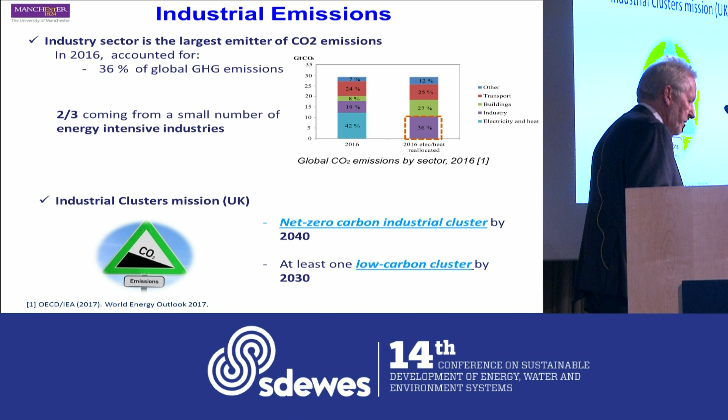In the UK, we have made a commitment to decarbonize, and we have committed to create the first net zero carbon industrial cluster by 2040, and at least one low carbon cluster by 2030. So that gives us a picture that industrial emissions are key if we're going to solve this problem of having a sustainable future. So industry is the largest consumer of energy worldwide.

You see here the breakdown, some 32% coming from industry. What's interesting also is that a large part of this, most of it, is actually down to process heating. Some of it is electricity generation, that's significant, but process heating is a major element there. So 69% of industrial emissions are from the process industries of that industrial sector, accounting for about two-thirds of industrial emissions.

So if we pursue this issue of how that energy is used, it's shown here as a breakdown in terms of process heating. We're taking this part of the energy consumption, 60%, and showing it broken down in terms of the temperatures at which it occurs. Although you can't read that, I can tell you that around 50% is relatively low temperature heating. Of course, if you go to steel making, it's very high temperature, but most of this heating goes on below 500 degrees C, and that's key to us.

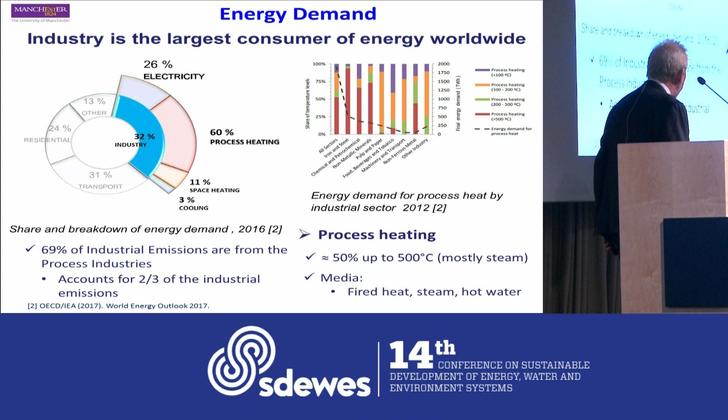Most of that would be supplied via steam, but we have different media coming into play. We've got fired heat, furnaces, steam, hot water, all coming into play.

Now, if we look at the trend with energy consumption, we see here a steady growth in demand for energy in industry through time, and around 2014, we saw a decrease in the rate of increase. I choose my words carefully here, we're not seeing any decrease in consumption, the rate of increase is coming down a little bit. Well, it's coming down significantly, slowed down to a third of that rate of increase. And that's good news, it's remarkable.

But if we just project going forward what the implications of that are, we just trend that away into the future.

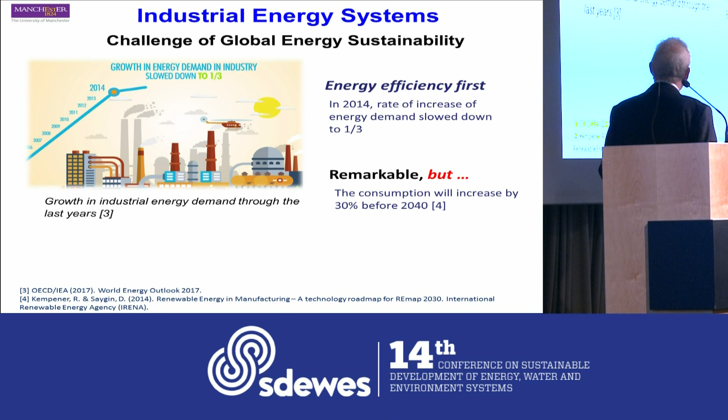That means we're going to use 30% more energy before 2040. Now, what does that mean in practical terms? It means adding another China and another India onto the consumption of energy, and that doesn't appear to be too sustainable. So, alone, energy conservation is not going to solve the problem.

We've got to reduce our demand for fossil fuels and their associated environmental impact. So the challenges here are we want to switch to renewables. We also want to carry on with energy efficiency. Both of them have a key role to play. What we're looking for in the long term is a 90% reduction in CO2 emissions by 2050, so that we can fulfill the Paris Agreement and keep our global temperature rise below 2 degrees C. That's the goal, and that trend is to move us to a more sustainable use of energy.

Let's look then, if renewable energy is going to be a key player, at the growth and how that's going. If we start with a baseline of 2015, renewable energy starts with some 19% of global energy demand coming from renewables. In power generation, that means 23%, but in the industrial sector, only 9%. So the industrial sector is lagging behind in terms of its adoption of renewable sources.

Then we project that through to 2030. That takes us to somewhere in the region of 21 to 37% of global energy demand being satisfied by renewables, which in industry would be projected to be 13 to 23%. Now those are rather large bands. The lower bound here is simply by carrying on with current policies. If we carry on the way we are doing, then we're going to achieve 21% and 13%.

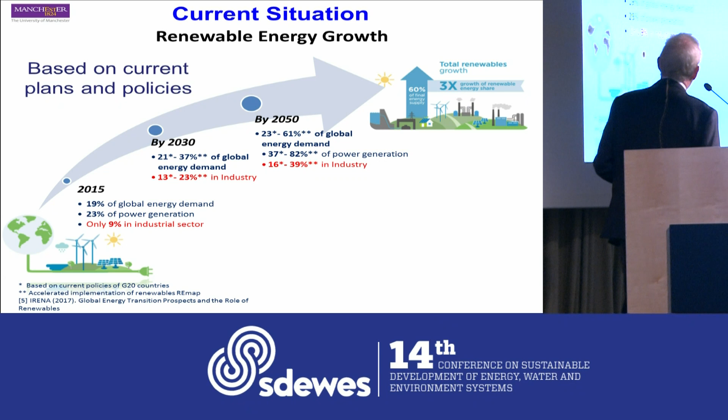Project it forward then to 2050, and we see some 23 to 61% of global demand being satisfied by renewables. In power generation, higher, as we would expect, 37 to 82%, and in industry, lagging behind, 16 to 39%. So the industrial sector certainly is lagging behind, and the good news is we're looking to something like 3 times the amount of renewable energy being used. So that would give us effective decarbonisation, but it also brings problems with it.

It causes fluctuations in supply, wind and solar. We don't have to explain why we get those variations. And to compensate for that, we need additional electric generation capacity.

So let's follow that through now and look at the implications in a bit more detail on future industrial energy systems. We've got to start with cogeneration. Combined heat and power generation: we use the energy both to generate electricity, and the energy that we're not using is used to generate heat, rather than the standalone arrangement where we have standalone power generation and we fire fuel to provide the heat that we need separately.

There's no new concept there. The Victorian engineers were very good at implementing this. It was well known to them, but we still somehow keep on learning this lesson: that combined heat and power generation is the most efficient way to generate electricity and heat. If we use CHP, it's some 40% better in terms of efficiency.

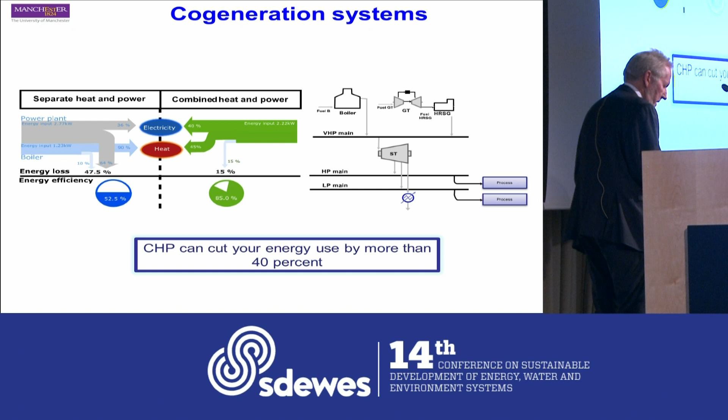But what we need to do then is to look forward and see how we might exploit that further. Let's start with where we are now at the moment. What we would tend to do is have electricity which is being distributed from a substation. The electricity is coming from centralized power generation via a centralized grid, but we'll expect to see certainly more solar and wind contribution to that supply, which would then go off to the residential consumers, to the commercial and industrial consumers here.

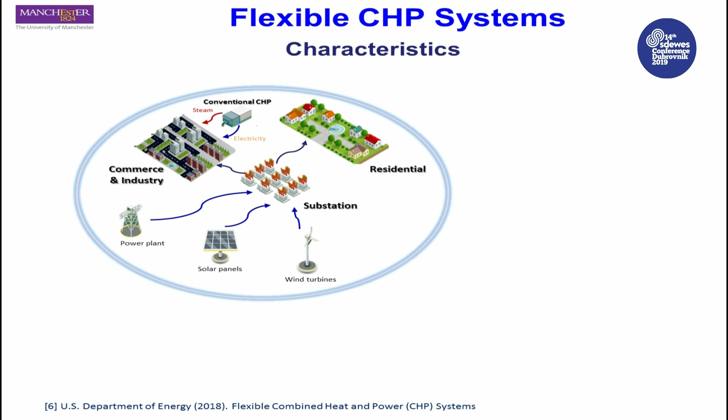And we're likely to see also conventional combined heat and power here. Not too much of it, but certainly some there, supplying heat and electricity locally to commerce and industry. What we need to do is make this whole concept more flexible and bring industry into this picture. So here we've got industry, heavy industry, playing its part in society, but being supplied by another CHP system, linked up to residents, perhaps providing hot water via district heating, electricity going into the substation, electricity may be going directly into industry, with waste heat from the industrial usage being used usefully in this flexible CHP plant, probably being upgraded to make it something useful.

So what we're looking towards is a more distributed nature of power generation.

Distributed, we obviously need to interact with the grid. We can provide both thermal energy and electricity with this arrangement, and we can also produce electricity for the grid. These flexible CHP systems can provide grid services, and I'm sure they're going to be important in the future, but there's very little attention being paid to them so far. It's very difficult to find examples even of this kind of decentralized combined heat and power arrangement.

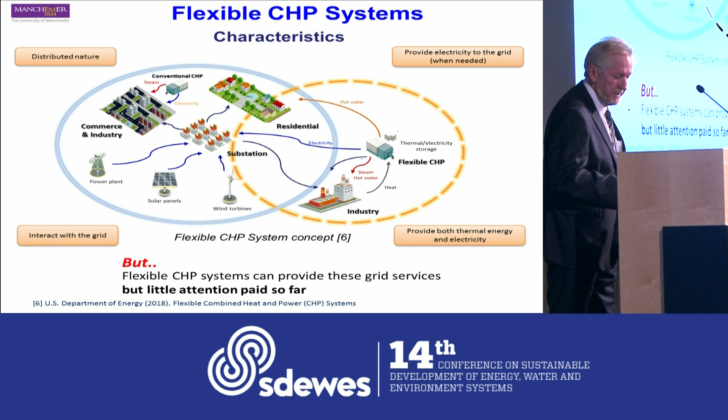Let's look in particular now in a bit more detail at an industrial system. We're supplying heat here in an industrial system. So a few words of explanation for those who are not familiar with steam systems: we use steam for most of the heating in our low temperature applications in industry.

And how do we generate the steam? Well, we fire fuel in a boiler, generate steam. Here it goes into a steam header, which is distributed to the various users. This is high pressure steam, at a high temperature, and then we let the pressure down to lower pressures of steam, medium pressure and low pressure steam. We let it down through steam turbines, and this is a good example of industry using combined heat and power.

We generate the power and we take the heat and use it for process heating. So we see here process heating at the high pressure, medium and low pressure levels. We've also got, just to complete the picture, some letdown stations, which are controlled arrangements to control the pressures of the steam headers. But traditionally we feed into this steam system by firing fuel in a boiler, which generates the steam that goes in here. That's a typical arrangement.

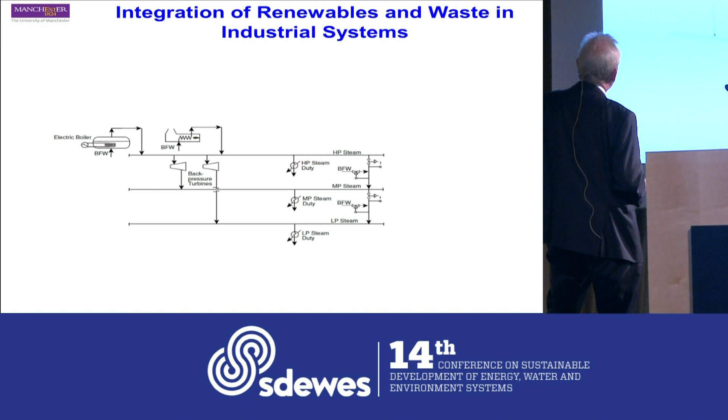If we look at what's likely to happen in the future, we're likely to see more renewables coming in. Now, renewable energy is going to come mostly in the form of electricity—whether it be hydro, solar, or wind—so we're going to get more of our energy as electricity. In which case, rather than having a fuel-fired boiler, we're going to have electric boilers, just like a big immersion heater generating steam.

This has important implications, because if we were just to take in electricity rather than firing fuel, we would use our electric boiler to generate steam. But there would be no point in having steam turbines, because there would be no point in turning electricity into steam and then turning steam back into electricity. So the system will have to change completely if we adopt this kind of renewable energy source.

But of course, life is never quite that straightforward, because we have other sources of energy likely to come in as well—for example, biomass. We can bring in biomass as a source of energy, whether it's crops or agricultural waste, and it comes in as some form of energy here, which is likely then to be fired. And in industry we're going to have a lot of waste gases. Certainly in the chemical industry, you can't get away from the fact that we produce waste gases. They can't just be discharged to the atmosphere, so you burn them—and you may as well burn them to produce heat and electricity.

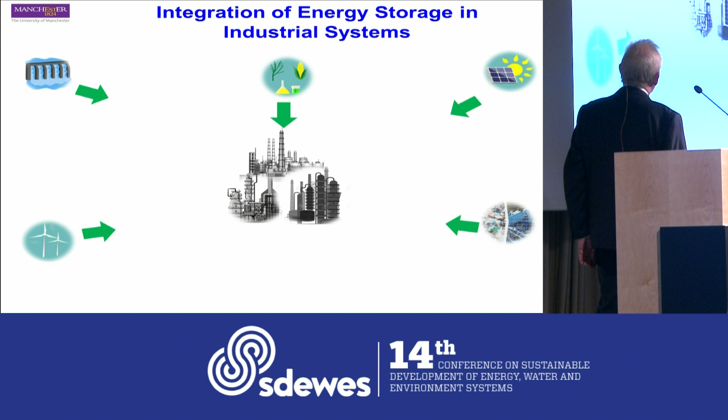Another feature, particularly as we introduce more renewables, is that we have problems with security of supply and variation in supply, and we need to think in terms of integration of storage—both electricity and thermal storage.

So for electrical storage, the three prime ones I would think of: pumped hydro—but for that you need to be in a place where you can pump water up to a hill in large quantities and leave it there until you need it, then run it down the hill.

Liquid air storage systems, where when electricity is cheap we liquefy air and store it as a liquid, and then when we need power, we allow the liquid air to vaporize and expand through a turbine to generate power. There is quite a large pilot scale facility in the UK demonstrating this as a viable option. But most of the talk, though, is about batteries.

A lot of talk about batteries, particularly grid storage of electricity. But we also have the possibility of storing heat. We can do it in our industrial steam systems using steam accumulators. Again, this is nothing new - the Victorian engineers were very good at using steam accumulators. We can also store as hot water, even though this is a less efficient way to store heat.

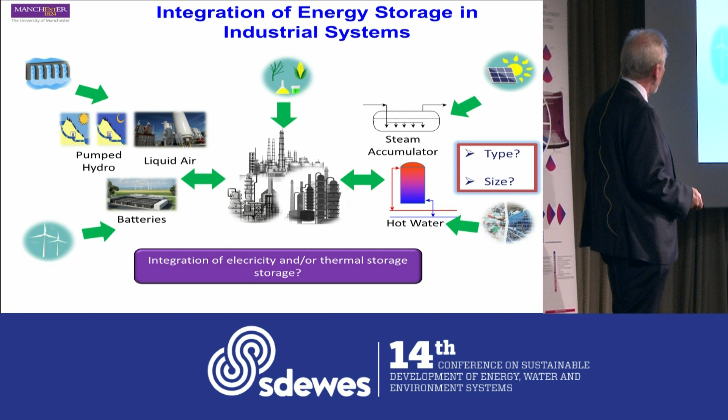So we want to know what type, what size, and we want to know how we are going to transition this whole thing from where we are to where we want to be in the long term, integrating the renewables, the different forms, different sources of energy, along with grid electricity. We've got storage, and how do we link everything up and make sure everything is supplied securely?

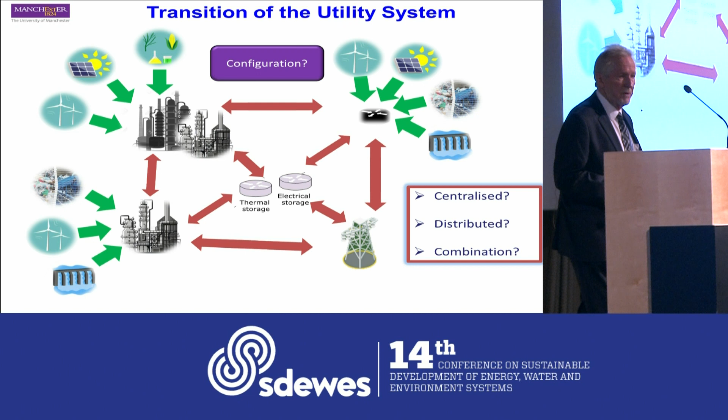We need to know the configuration. We need to know, another important point, whether we are going to centralize or distribute the power generation, and maybe use a combination of the two.

So where does it get to? It gets to our goal here. Our goal is to develop a system, a design and optimization framework that takes in the needs of the industry - heating and cooling profiles, the power requirements - and that framework will design the utility system, the energy system, whether distributed or centralized, and also tell us how to operate this system, the operating strategy.

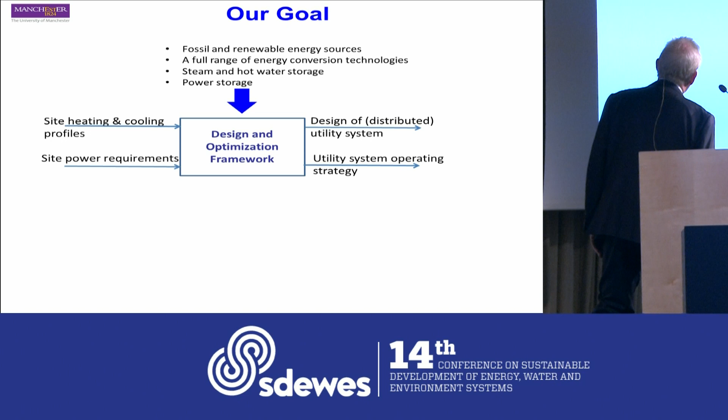Into this, as options, we will have fossil and renewable energy sources, a full range of energy conversion technologies, storage of steam and hot water, and also power storage. And then we have constraints that we're going to have to live with, constraints on the utility options. We're going to have time dependency coming in here too, because we can't generate solar power at night. We've got life cycle costs which need to come in, and we also want to put in sustainability constraints.

And if we can develop this framework, then we can use it to develop roadmaps to evolve from where we are to where we want to be in the long term. We're not going to get there in a single step, so we have to evolve over a period of time and develop roadmaps to see where we want to be in the long term.

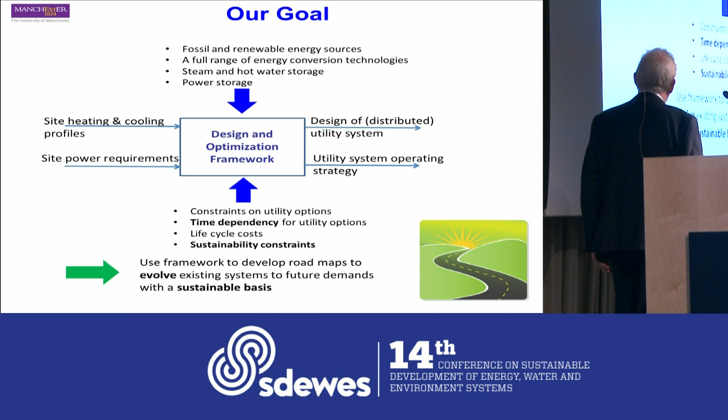So how do we do this in a bit more detail? How do we do the conceptual design of future industrial energy systems? A little bit of detail - I can't go into too much, I know there's a mixed audience here, but I'll try and give you a flavor for how we're going to do that. We start with, on a site or in an industrial cluster, we have processes that have energy demands.

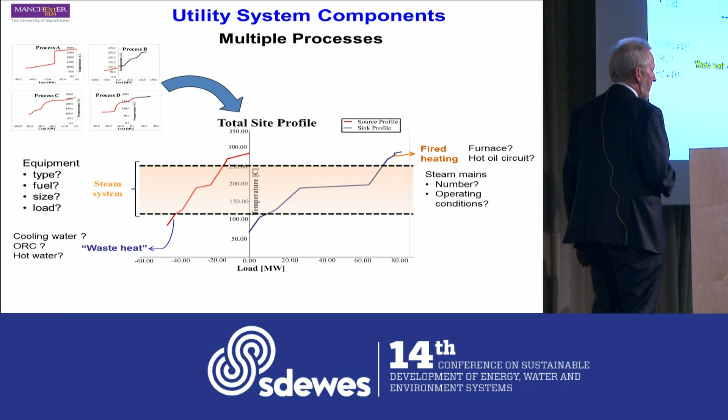At the higher temperature end here, too high to provide with steam, we're going to have to provide some fired heating, a furnace. Down here at the bottom end, we've got cooling, too cool to involve with the steam system. So are we going to use cooling water? Are we going to try and recover it with an organic Rankine cycle? Or are we just going to capture it as hot water and use it usefully somewhere else?

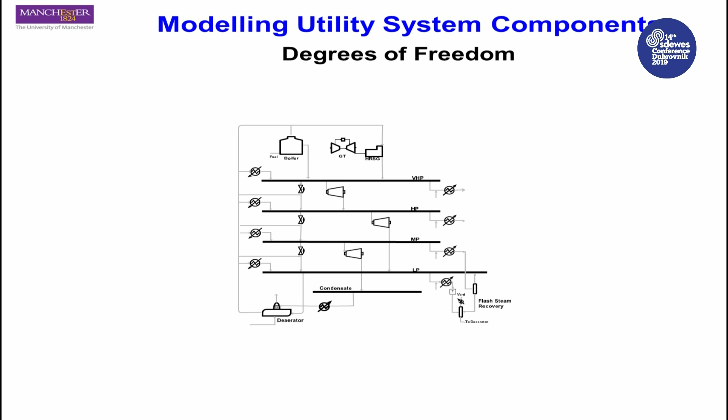So what are the degrees of freedom? Here is a steam system like the one I explained before. Boilers, a gas turbine here with a heat recovery steam generator. Here's steam generators producing steam from waste heat from the processes, steam turbines letting down between the steam mains, deaerators producing the boiler feed water.

And for the boilers, we want to know what type. Are we going to use electric boilers, biomass, waste heat boilers? What type of fuel, biofuels, natural gas, waste gases? What temperature and pressure we're going to have, what size and load we're going to have.

And then we have another complication. This is not going to operate at steady conditions. It's going to vary in its operating conditions, and the performance of this equipment in terms of its efficiency will vary according to its load. So its efficiency will vary, and we need to take that into account. So the models need to capture the effect of load on efficiency.

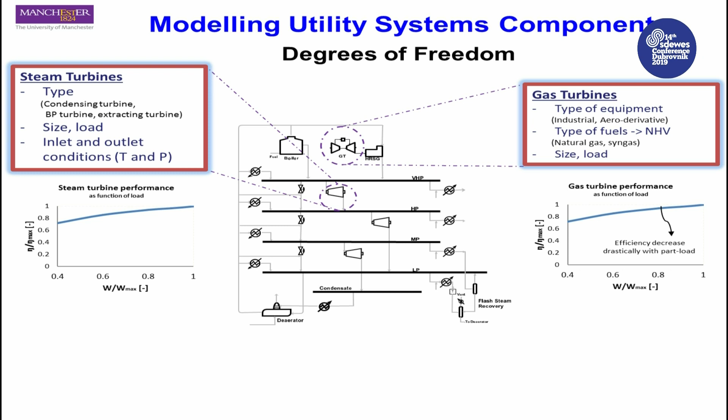So here then we've got the steam turbines, similar kind of story. We need to know the type, the size, the inlet and outlet conditions, and the efficiency of that turbine will vary according to the load that we put on it. Gas turbines, similar story. We want to know what type and size and so on, what fuel we're going to use, but the efficiency also varies with load.

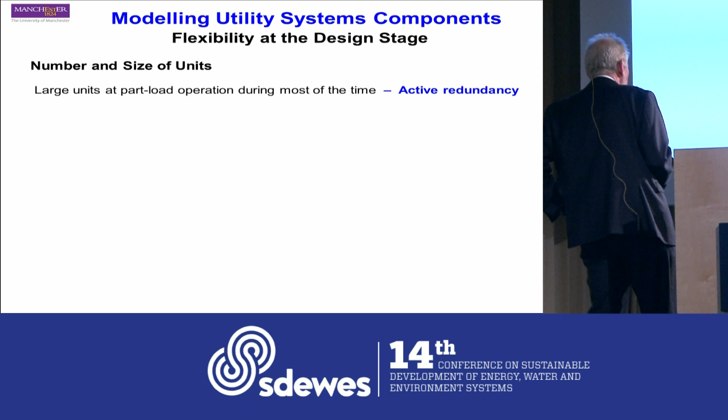So we also want to build in flexibility in terms of the number and sizes of the units. Now here is an additional complication which is often being neglected in the design of these systems. They're never at steady state conditions, but they always must operate. Otherwise it creates major problems and even safety problems in the processes, in the manufacturing processes. So we either use large units at part load, operating most of the time, which we term active redundancy, spare capacity, or we use small units at full load, one switched off, which we term passive redundancy.

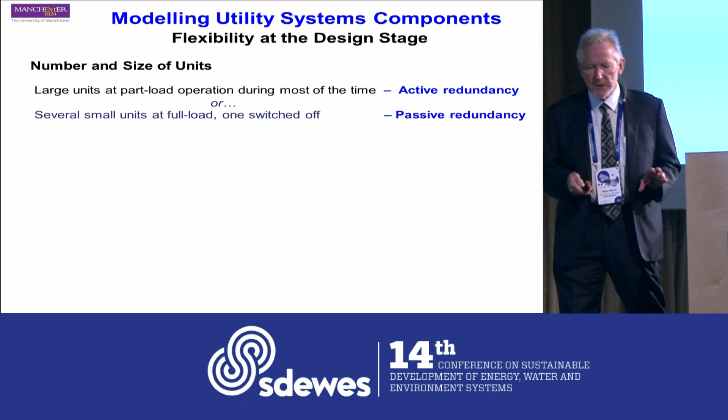And we've got to make basic decisions here. This utility system, this energy system, must always operate. Even though it's got a varying demand on it, it's got a varying supply to it, it still must always operate. So we can use bigger size units, which might be more efficient, but when they go to partial load, they become less efficient. Fewer units might be less expensive, but with fewer units, it becomes less reliable. So we have some basic decisions to make.

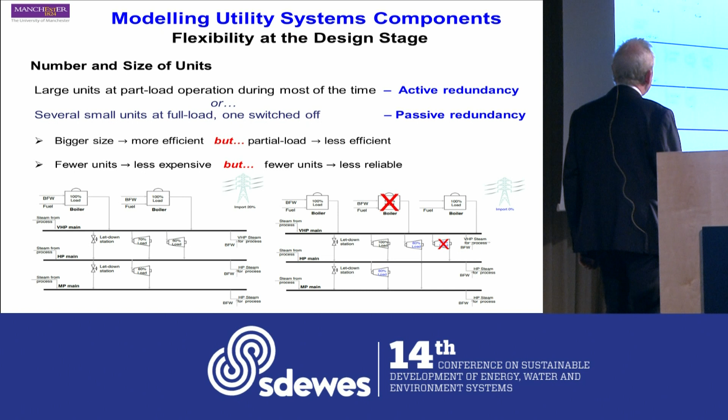Here's a steam system, and maybe we want to put in some redundancy here, some spare equipment, an extra boiler just for contingency, and an extra steam turbine there. And these are basic decisions that we need to make. And so for those types of units, more units of the same type or more units of different types but performing the same functions, also a possibility.

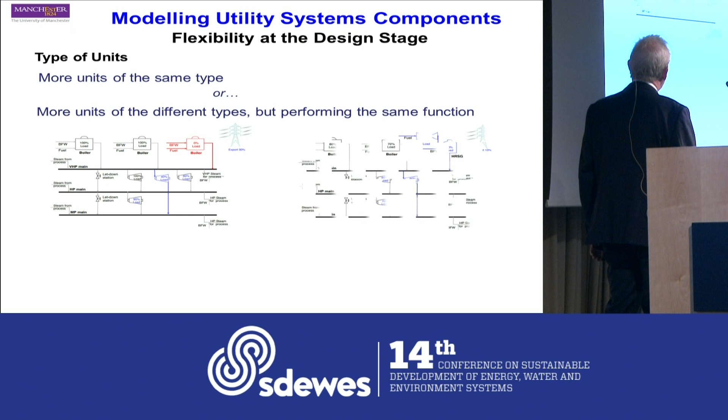So here, rather than having a steam turbine, we have here a gas turbine with a heat recovery steam generator. So multiple design and operational degrees of freedom, and these variables are highly interrelated. So it's a complex optimization problem.

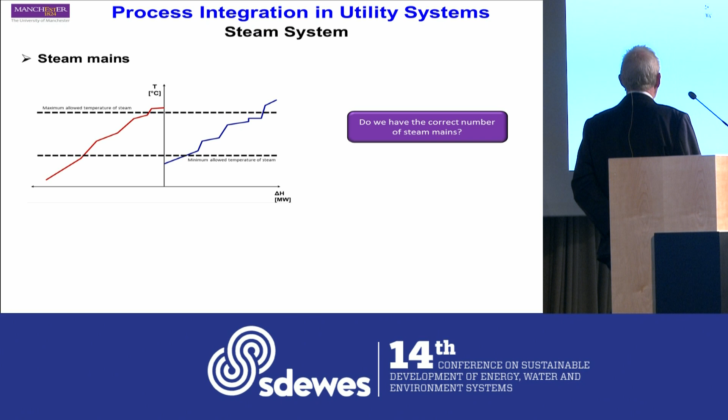So for the steam mains, we need to know whether we've got the right number and size. Here's the range over which the steam mains are going to operate, and maybe we decide we're going to have 2 steam mains like this operating somewhere in these ranges, and we don't quite know where yet, but we're going to decide that later. And for the high temperature, we're going to use a hot oil to heat it, and maybe we're going to introduce a 3rd steam main. So if we introduce a 3rd steam main, like high pressure steam as we've done here, this may bring us benefits.

So we need to know the steam mains pressures, and we need to know what kind of conditions under which they're operating. So here we see on the right a site cooling profile where we're generating high pressure, medium pressure, low pressure steam and rejecting heat to cooling water. And over here we're using high pressure, medium pressure and low pressure steam. And there's a fundamental assumption there that the only heating from the steam and the only cooling from the steam is all at saturated conditions. Now that's just to simplify the diagram for the moment. I'll come back to that point.

So maybe we choose to use medium pressure steam at a different pressure, so we drop the pressure. And that might allow us to generate more power in the steam turbines. But if I'm going to drop the pressure here, I'm also going to have to drop the pressure over there on the using side, which means that I'm going to have to use more high pressure steam and less medium pressure steam, which means I'm going to lose power generation capacity. So it's not a simple trade-off, this.

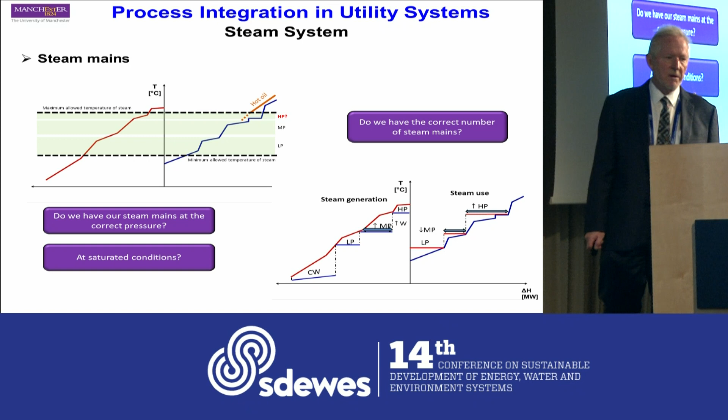Another point we need to bring in is that steam is generated in the first instance by taking boiler feed water, preheating it, evaporating it, and then superheating it. The synthesis methods published to date use only the latent heat part of the steam, but we must include the boiler feed water preheating and the superheating. This is an essential feature.

Just to give you an idea of the kind of errors this brings in if you assume only the latent heat: for high pressure steam, the latent heat is about half of the total energy to take you from boiler feed water to superheated steam conditions. So major errors if you don't include these effects. You might think this is a fairly trivial addition, but it becomes very non-trivial when you start to do the calculations.

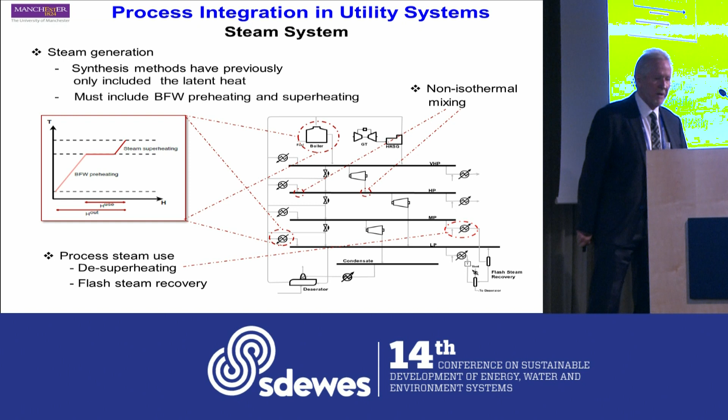When we're accounting for the use of steam, the processes are using steam for their heating. They might want to do desuperheating of the steam because they don't want superheated steam, and they might want to do flash steam recovery. Another complication is that we have non-isothermal mixing in these arrangements, which creates mathematical problems for us. So how do we solve the problem?

Well, we're going to get the structure we want by creating a superstructure. I'm sure a lot of you are familiar with the concept, but basically what you do is create a structure that has all the features you might potentially want for an optimal answer. You're not going to include them all in the final design, but you create this superstructure, then optimize it, and get the optimization to remove the structural features which are not economic. That's basically the approach.

So you're going to optimize a superstructure, including all the structural options, to obtain an energy efficient structure and the optimum conditions, the operating conditions for the steam headers and all the rest of it.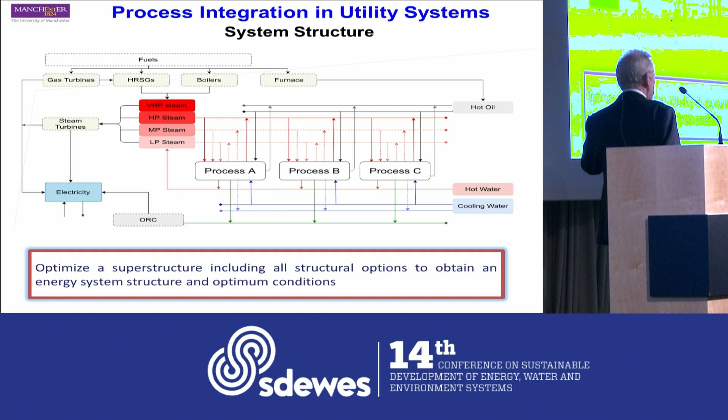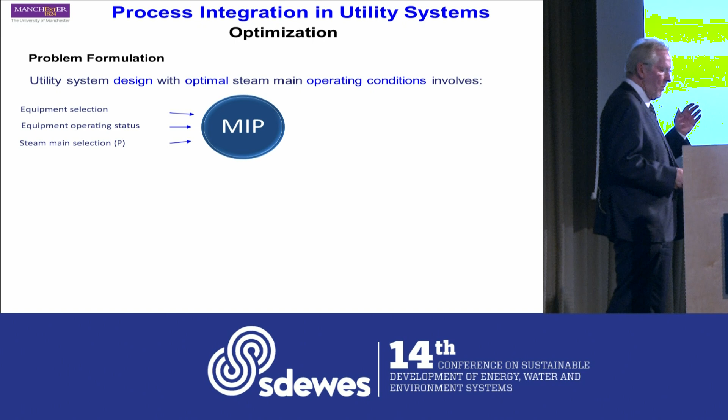So the problem formulation for design and determining the operating conditions: part of it is that we have a mixed integer program. We make our discrete decisions by introducing integer variables, 0,1 variables - 0 if it's not there, 1 if it is there. Then we've got other parts of the problem which are nonlinear mathematically, so we have a nonlinear program. This accounts for things like equipment performances, steam thermodynamic properties, and when we put the two together we have a non-convex mixed integer nonlinear program.

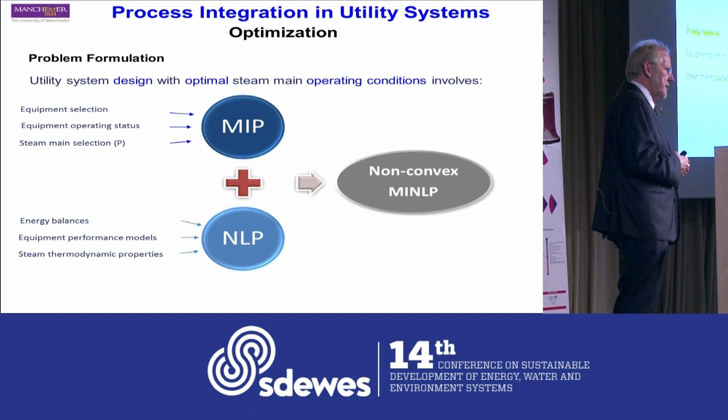The people who enjoy this kind of optimization work rub their hands with glee when they see an MINLP problem. I'm afraid I go yuck, accept it, and then move on, because it brings in all kinds of complexities in the solution. So it becomes a complex and time-consuming solution.

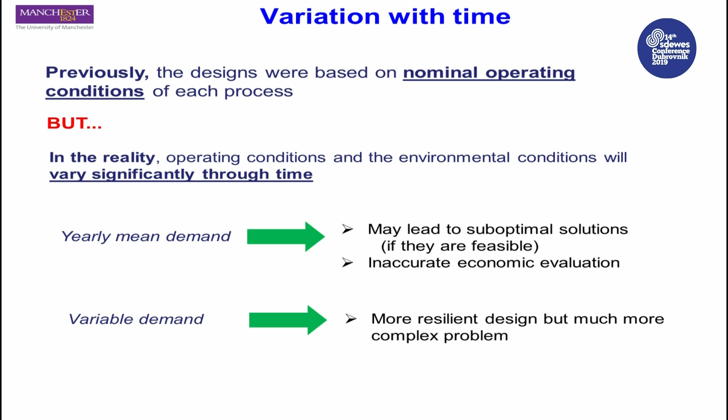Another problem: previously, designs were based on nominal average operating conditions for each process. But in reality, things vary through time. If we take a yearly mean demand, that might lead to suboptimal solutions and inaccurate economic evaluation. If we account for the variable demand, the design is going to be much more resilient, but it's also going to be a much more complex problem to solve.

So how do we solve this? Well, we introduce multiple periods. We slice up time into periods, and within each period we assume things are at steady state. So we've got lots of these different periods to account for the variation through time.

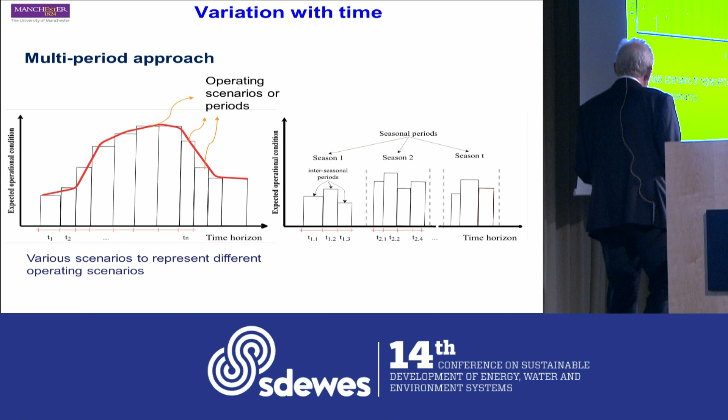This might simply relate to the season as we change through the year, and within each of these periods we might have inter-seasonal periods, so we might want to take account of changes through the time of day, the day of the week, and the time of year, the season of the year. All of these we might want to do.

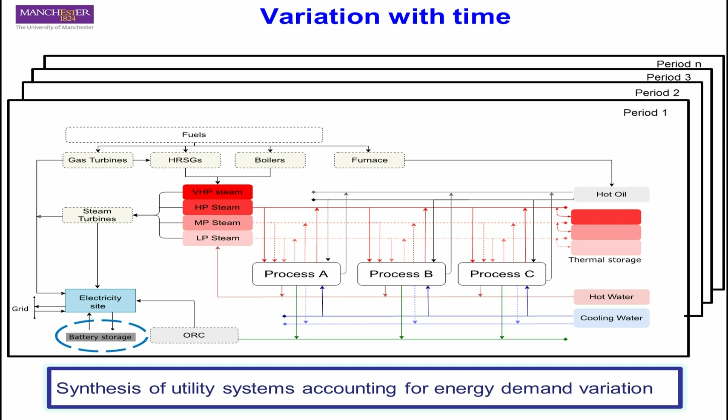And how do we deal with that? Well, we've got to create a structure where it looks schematically like this, with these different operating periods, and we've got this design which has to function across these different operating periods, but it will function different ways in terms of its economics and environmental impact as it goes through those different periods. So we need to synthesize the utility system, accounting for those energy demand variations.

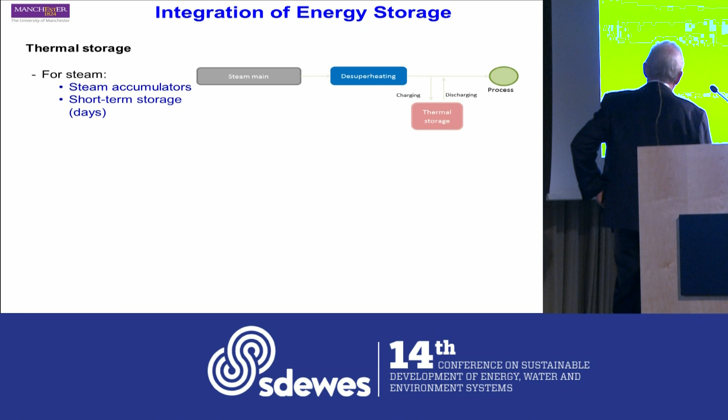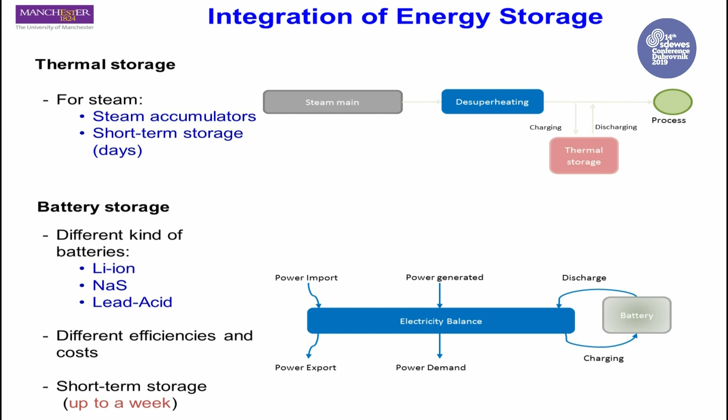We also need to include energy storage. For steam, we can put in steam accumulators, for example. This can give us short-term storage of heat as part of the system, but it's a relatively short period, hours or days at the most. We can bring in battery storage, different kinds of batteries, lithium ion, lead acid, and so on. These have different efficiencies, different costs, and also short-term storage, but this time possibly up to a week.

We've adopted two different approaches to the optimization. We've tried different ways to solve the problem, same problem but different solution strategies. We tried using, for those who understand these systems, a successive mixed integer linear program. It works okay, but doesn't give a guarantee of global optimality. It gives you answers, but not necessarily the global optimum answer. It's relatively fast, runs in something like 500 seconds or so.

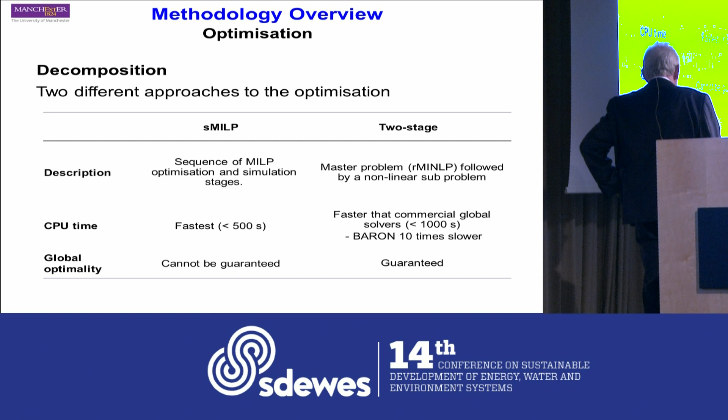But the approach that we've adopted in the end is a nonlinear approach where we use a relaxed mixed integer nonlinear programming approach followed by a nonlinear subproblem. This has been used previously, so we're not claiming any novelty in that. We have researched it, compared it not just with the successive mixed integer linear approach, but also with commercial solvers like Baron, part of the GAMS suite. We find it gives much more robust answers with guaranteed optimality. Relative to the Baron software, it runs about 10 times faster.

So we've got a method to solve our problem. Let's try it on a case study. Here is a site. It's a 6-plant chemical cluster. We want to know the utility system to satisfy the thermal and electrical demand.

We've got electrical price fluctuations, which we'll see on the next slide. We've got semi-continuous processes, and we've got variation of the production profiles. We've also got maintenance and shutdown. So you see here the operating profiles.

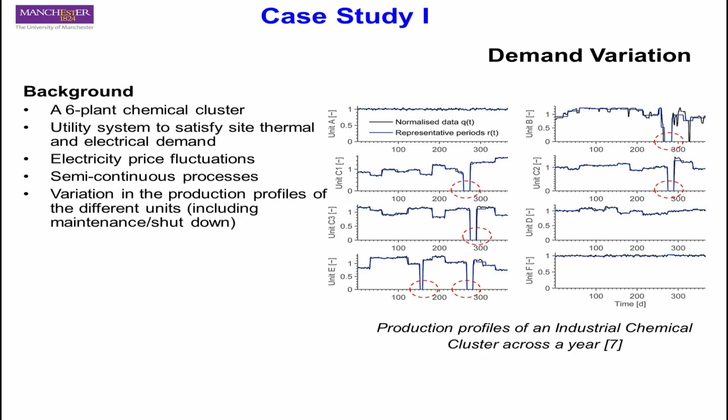This one is fairly steady state. This one is up and down. This one is up and down. So we've got the operating profiles here for this chemical cluster, varying through time.

The constraints we're going to impose are utility temperature constraints, equipment load and size, and we're going to restrict ourselves on the import and the export potential to 1 and 10 megawatts.

We've got electricity price fluctuations across the day. We've got off-peak, peak, and base price. Across the year, we've got winter, summer, and mid-season.

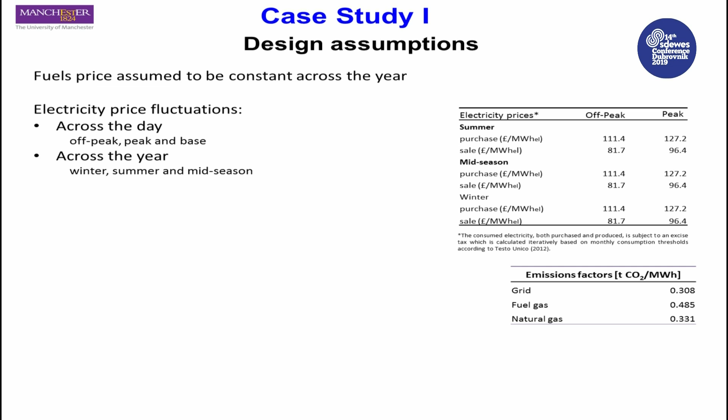Some of the numbers are up there for you, but another point to note here are the emissions factors for CO2 emissions, for grid electricity, fuel gas, natural gas. We've got those emissions factors in there because we look at CO2 emissions later.

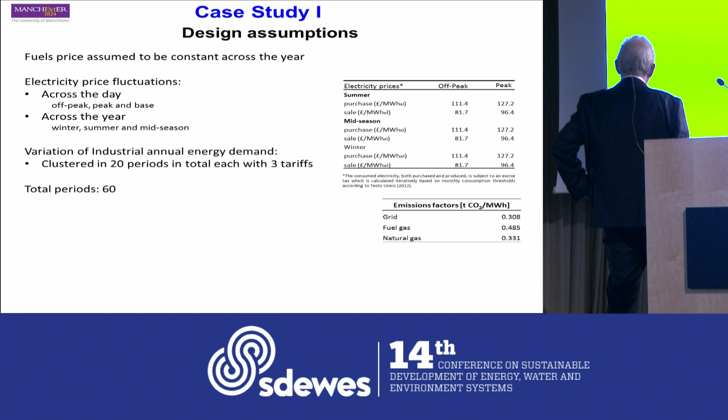The variation of the annual energy demand has been divided into 20 periods, each with 3 tariffs, giving us a total of 60 periods that we are going to analyze the problem for. We're going to also analyze 2 scenarios in order to analyze the effect of energy demand variation, and that's firstly to minimize the total annualized cost, and also then to just minimize the carbon dioxide emissions.

Firstly, if we optimize for total annualized cost, then we will see here the solution for the energy system for that cluster if we assume simply the average conditions. So we're assuming nominal conditions, and that's the design that we get. Compare that with the design that we get if we assume a variable demand. It looks superficially similar, and it is kind of similar, but what you see are different operating conditions and different design configurations as a result of taking account of the variations.

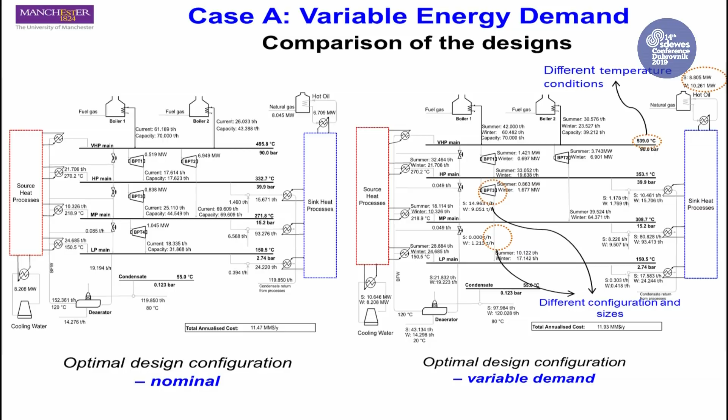This shows the electrical operation to satisfy the electrical demand. The thick line at the top is the electrical demand and how we are satisfying it. In some cases, we are importing, and sometimes we are exporting electricity down here. So the electricity here is being satisfied by generating electricity from 4 steam turbines, with some export and some import in some cases.

The thermal demand here, we see this line varying through the year, and we're supplying that with a combination of 2 boilers and a hot oil circuit down here.

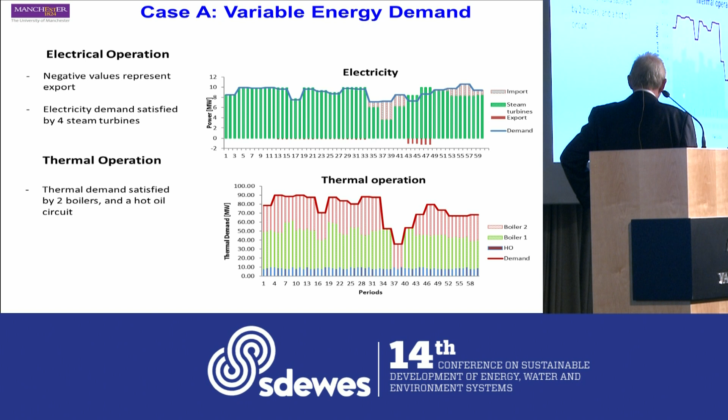We'll also note here why we are dipping down and importing electricity here. We're importing electricity at this point because we don't have a high thermal demand there, and therefore we can't co-generate our electricity. And that's what's leading us to import electricity at that point.

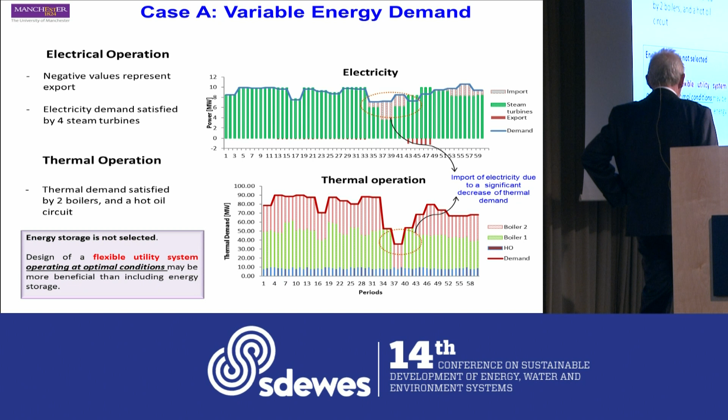Another point to note is, although we have included energy storage as an option, it's not picked it out. What this is doing is designing a flexible utility system, and it's paying for and operating a flexible utility system rather than using storage.

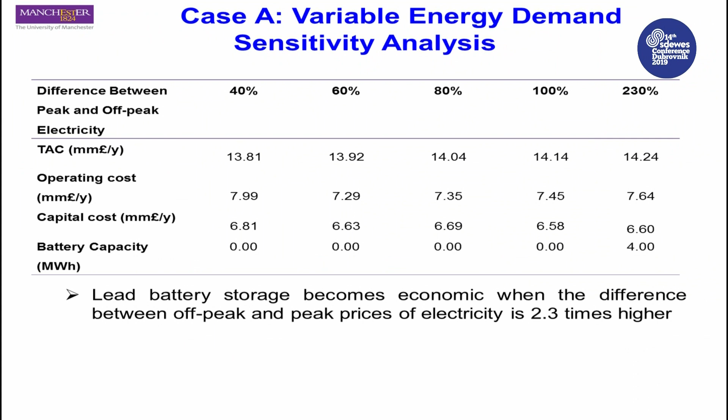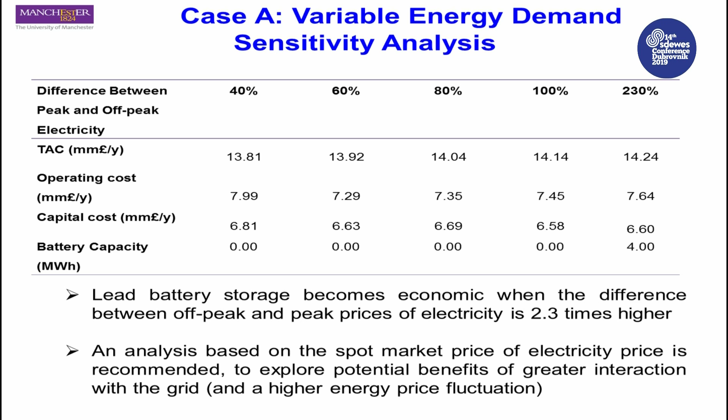These are lead batteries, and it requires 2.3 times higher peak price in order to make them economic. If we were to use spot market prices for the electricity, we're likely to see a different story again. You can analyze this problem either using well-defined tariffs or using the spot market. The spot market gives wilder variations, and it's likely to see more storage under those conditions.

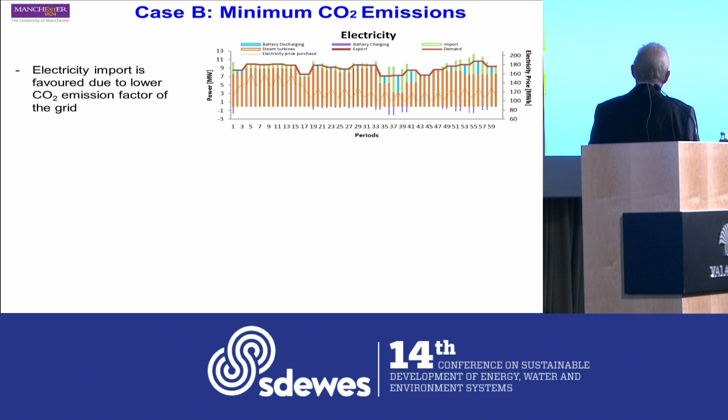But doing the calculation again with minimizing CO2 emissions, we get a different picture. Here is the electricity, and there is the demand for electricity, as we see here. The picture is different now. We still got a lot of generation of steam from steam turbines, but you will see also here batteries being used - they're being charged down here and discharged up here. So battery storage is starting to kick in here in order to reduce the CO2 emissions.

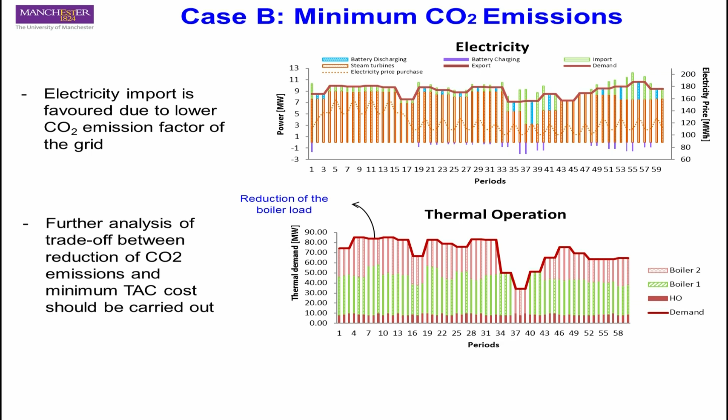Thermal operation, pretty much as before, 2 boilers and a hot oil circuit. Overall, a reduced thermal load as a result of the optimization, but further analysis would be required here to get this trade-off between CO2 and total annual cost.

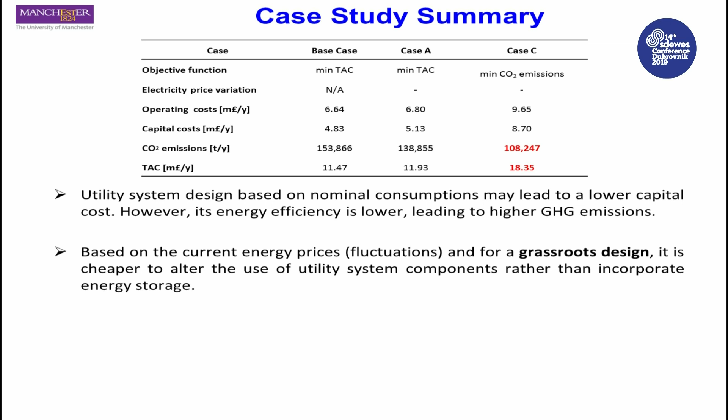So, summarizing this study then: utility system design based on nominal consumptions can lead to lower capital cost, but lead to lower efficiency and higher greenhouse gas emissions. Based on current energy prices, it's cheaper to use the utility system components rather than to incorporate energy storage - cheaper to incorporate flexibility into the design rather than to use energy storage.

I'm a bit surprised by that. Maybe you are, but I'm a little bit surprised. But that's how it is. It is what it is.

At significant fluctuations in electricity price, storage can have the potential to reduce the total annual costs, but it really does require a significant difference between peak and off-peak electricity for that to happen. And storage has the potential to reduce CO2 emissions. However, there's a significant trade-off here between cost and the performance.

I'd like to just finish off now by putting this within the context of energy and society. Industry at the moment pretty much operates on its own, separate from society in terms of energy. But in the future, we need to bring all of this together, energy and society. So here is society, including industry, transportation, commerce, domestic energy, aviation, all the rest of it.

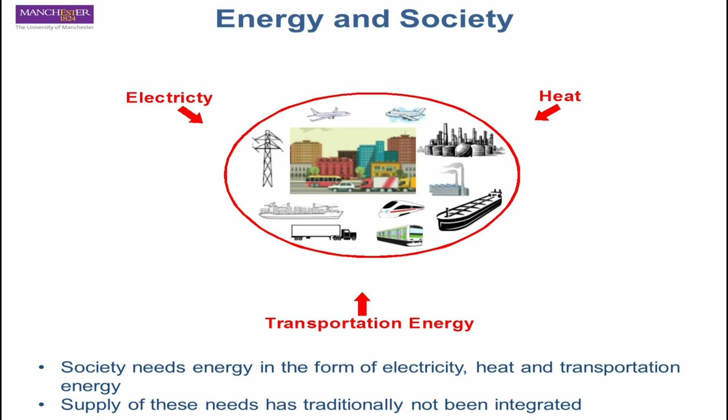What do we need overall? We need electricity, we need heat, and we need transportation energy in order to satisfy the requirements of society. And these have traditionally not been integrated. Another problem that we need to understand is that energy is competing for resource with the supply of water and food. And traditionally, we haven't looked at this problem either.

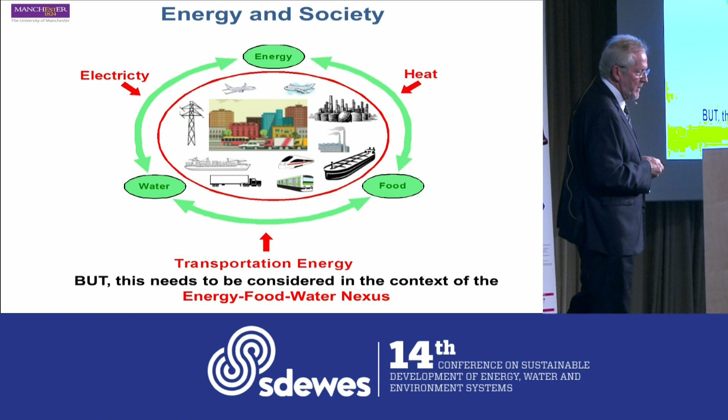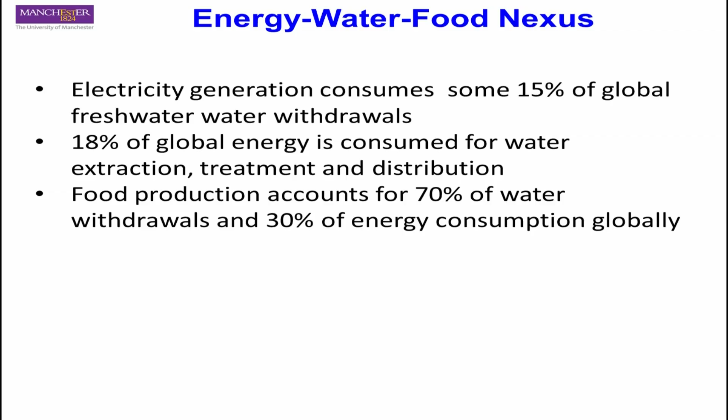So the provision of energy needs to be considered within the context of this so-called energy, food, water nexus. So what is the nexus? Well, electricity generation consumes some 15% of the global freshwater withdrawals, so significant interaction there. 18% of the global energy is consumed for water extraction, treatment, and distribution. Food production accounts for 70% of the water withdrawals and 30% of the energy consumption.

So therefore you see the basis of the energy, food, water nexus. And these interrelationships among the nexus are really critical to us going forward. So the security of the energy, water, food nexus is a central challenge to the goal of sustainable development. As far as energy is concerned, any sensible strategy has got to start with demand reduction, whether it's domestic, commercial, or industrial. So that's the place to start.

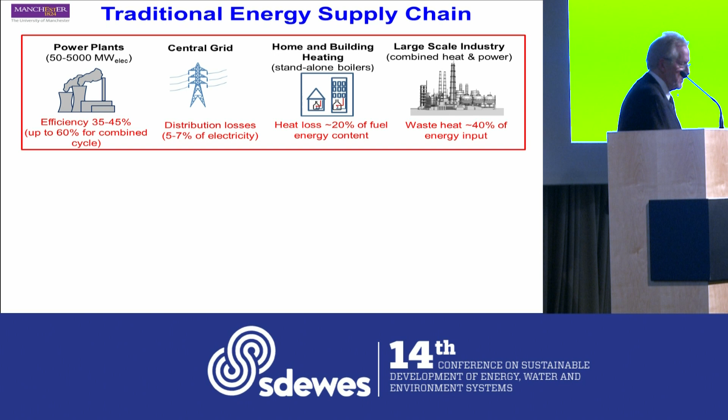The traditional energy supply chain has everything separate. We generate electricity quite inefficiently in standalone power stations. We then put it into a central grid where we have other losses. We generate the heat domestically by firing fuel in our homes. And industry over here on the right does use combined heat and power, but if you look at the way they use energy, around 40% for the large-scale energy users gets simply thrown away as waste heat.

Rather than use the traditional model, we've got to move towards a distributed system, where we have a distributed arrangement of energy generation linked up to different sources of energy, waste heat from industry sending heat off to local commerce and domestic requirements, electricity providing transportation energy in the future, power storage and heat storage. So rather than centralize everything, let's distribute everything.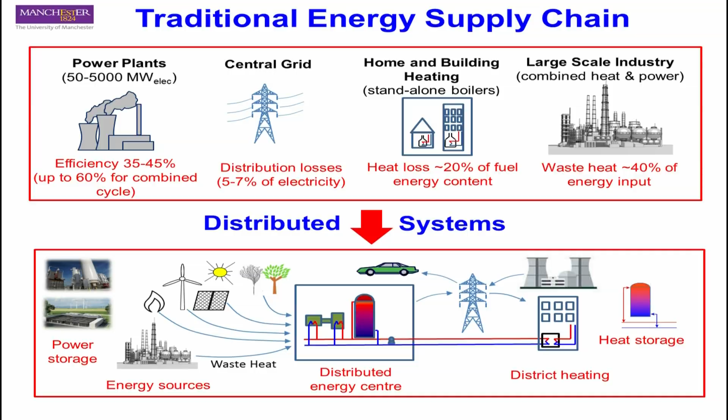Next thing is, there's no one-size-fits-all solution to this. For a geographical region, there's no single solution. For example, a city centre community has different requirements from a rural community. A city centre, densely populated area, has domestic waste as a possible source of energy, while a rural community, sparsely populated, has agricultural waste as a significant source of energy. The two don't marry together.

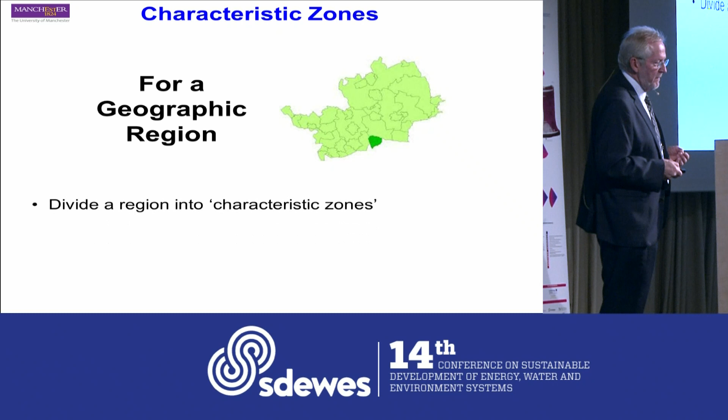So for a geographic region, we should divide the region into characteristic zones, exhaust the potential for demand reduction, and then apply solutions based on distributed energy systems.

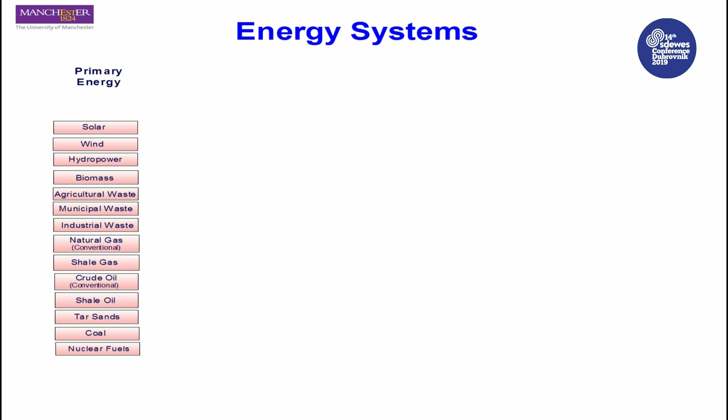So how do we optimize the system integration? Well, we've got to look at the basics. Over here we've got primary energy - solar, wind, hydropower, biomass, and so on. Over here we've got society and industry needs - we need electricity, heating, cooling, energy for cars, energy for buses, and so on. What we need to do is link the two together as efficiently as possible.

Different steps we need to go through for that: primary energy conversion, use energy vectors to move the energy around, secondary energy conversion, before we can link these two together. So what are the options?

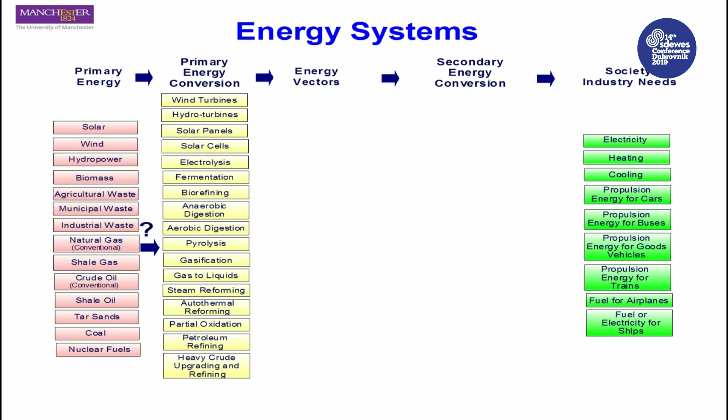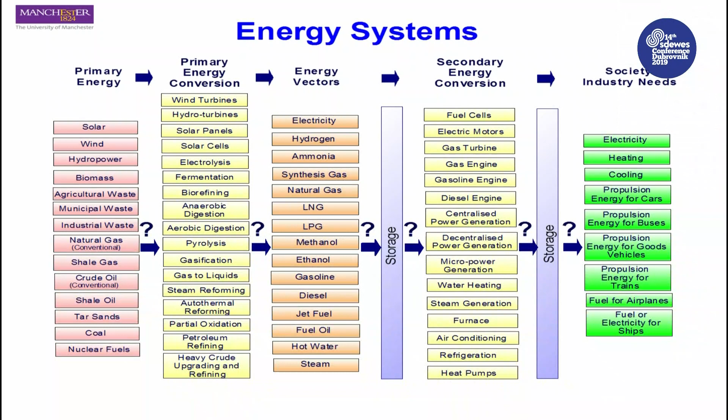Primary energy conversion - we've got wind turbines, hydro turbines, solar, and so on. The energy vectors - we can use electricity, hydrogen, ammonia, synthesis gas, lots of options here. We can use storage at that point of these energy vectors. We then need a secondary energy conversion, which could be, say, hydrogen going into fuel cells, electricity going into electric motors. We can also store energy at that point as well, storing electricity, storing heat, before we finally link up the primary energy with the needs.

And of course, all this then has got to be constrained by the energy, water, food nexus. So the problem is there are an enormous number of ways to integrate the systems, but it's also an opportunity for novel solutions to provide novel ways to integrate different systems.

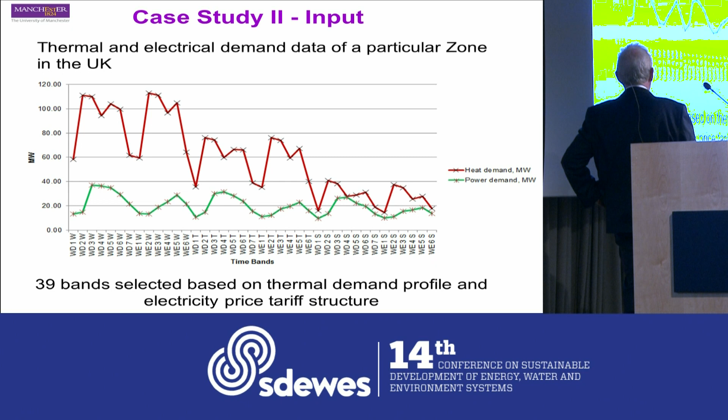So let's finish up quickly with a case study, and this is from the UK. This is a geographic zone in the UK showing the thermal and electrical demand, divided into 39 bands across time. We look to supply the energy with a distributed energy center, lots of different options in there - gas engines, gas turbines, fuel cells, and so on. We've got variations of tariffs, and grid emissions factors there, different prices going through time.

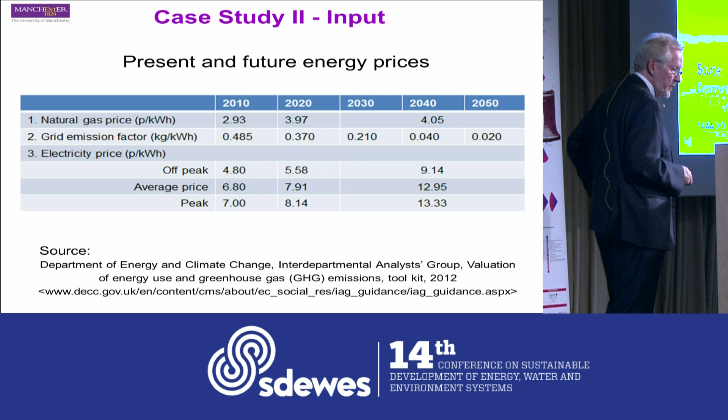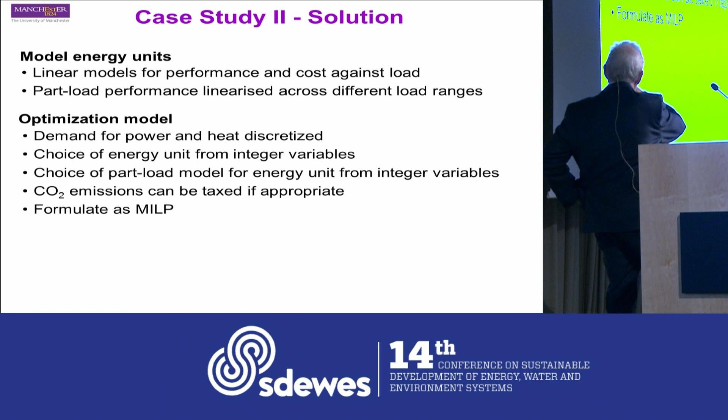And what we need to do is model this system, and we did it using linear models in this case, and model the performance. The performance varied with load, but we linearized that. And for the optimization model, we discretized everything through time.

We chose our different options using integer variables, as I explained before. We did part load effects, CO2 emissions, and formulated the whole thing as an MILP - a mixed integer linear program - constraining on the basis of maximum, minimum loads and maximum CO2 emissions. Depending upon the scenario you choose, you can get different solutions.

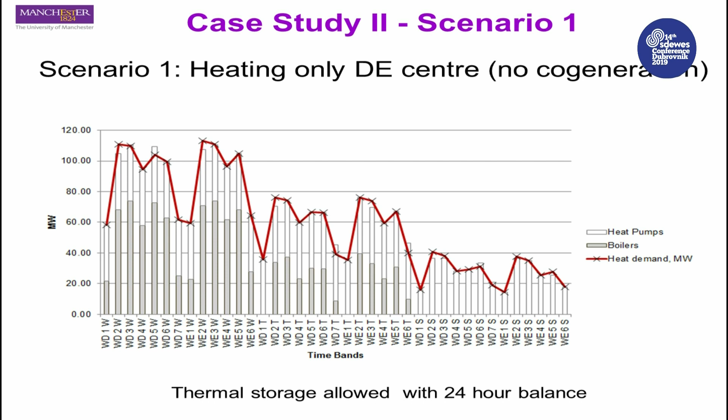So here we see the heating supplied with a complete import of electricity, no cogeneration, and we get a solution here based on heat pumps, boilers - that's the solution where we don't allow power generation.

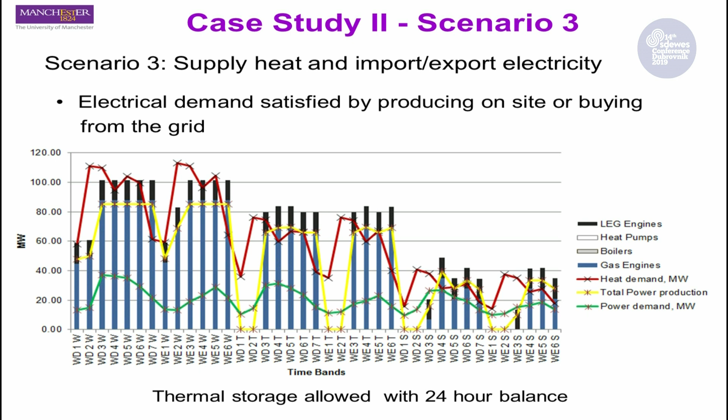Another option is if we allow import-export - and a different solution again, different combinations if we allow import-export. The result overall was, we applied this on behalf of the UK government to see what would happen to CO2 emissions if you use distributed energy to replace the current system.

Across the UK, and we did different zones across the UK, it's about 40% reduction in CO2. But it's basically energy efficiency—it's not a significant introduction of renewables, no waste to energy, no power storage, and various things.

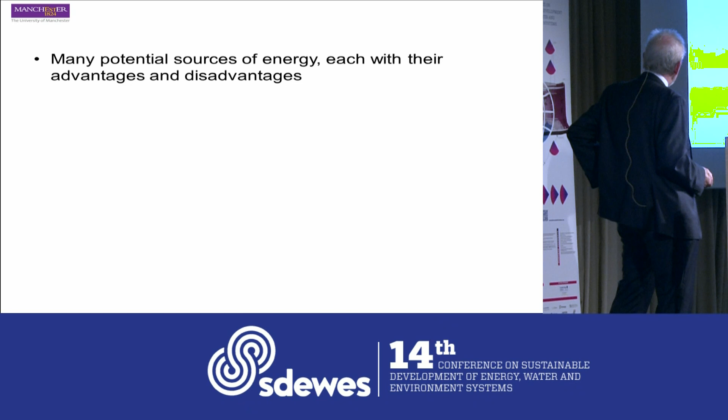Finally, conclusions. Many potential sources of energy, each with advantages and disadvantages. Variability of energy demand creates challenges for supply and the security of the energy, food, water nexus—a central challenge to the goal of sustainable development. Novel solutions can in principle be developed through optimization applied to the needs of geographic regions, and novel solutions need to be sought through novel ways to integrate energy systems.